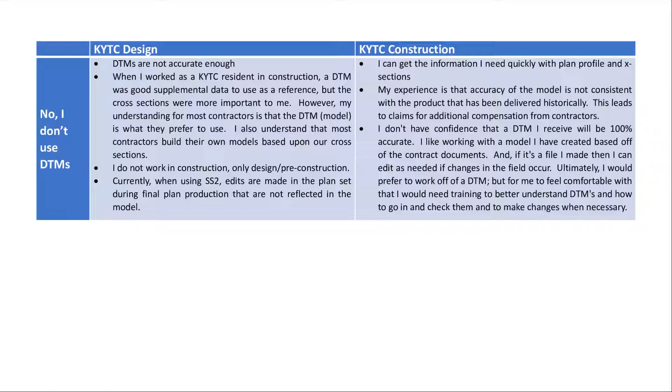So remember, we surveyed design and construction. Here's some comments we got from people that said that they don't use DTMs. When someone says a DTM is not accurate enough, it can mean that they're not seeing the accuracy between the final PDF plan set and the model. Different things are meant that way. We know that InRoads has been capable of modeling to a high degree of accuracy for a while now, so that's not the issue.

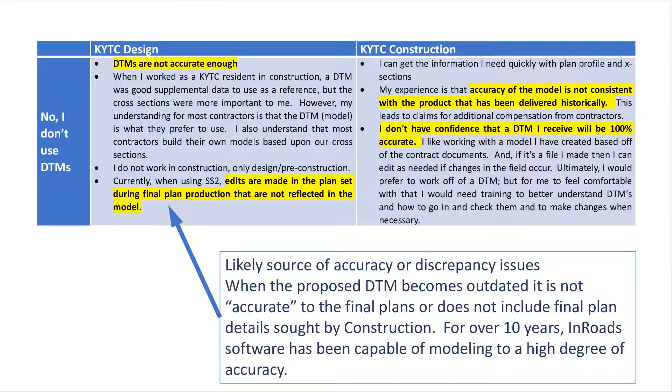Here are some comments from those that do use the DTMs. There's some interesting ones in here.

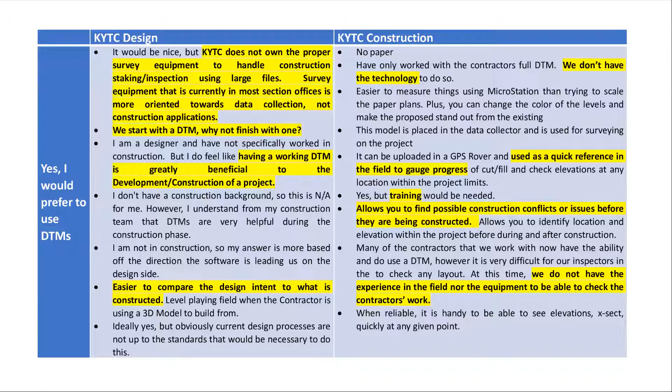I don't know, Brad or Kevin, is this really small for everyone to see? Do I need to go into these more? I can read it pretty well, it's just a small part of my screen. Okay, yeah, you're doing good.

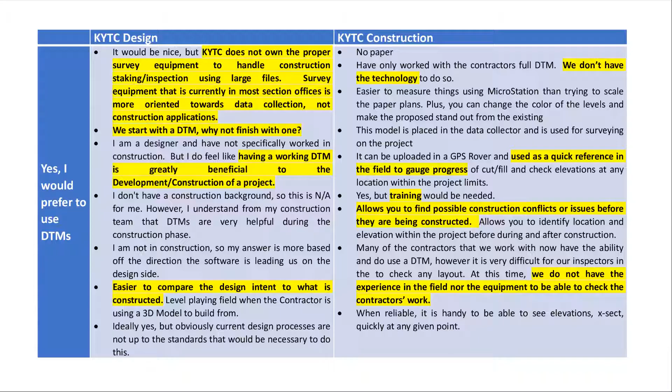It's plenty legible. Some of these were particularly interesting to me. One designer pointed out they thought design intent was much easier to review using a model than paper plans. When training was mentioned, it was said it should be geared towards regular inspection duties. In case we have construction staff on here, there is training available through the CAD support section for that effort to survey on site.

Here's a couple of my favorites. One person in design said, we start with a DTM, why not finish with one? That speaks to the loss of detail that happens when you go to a 2D PDF plan set from a model. Then one person said they didn't have the experience in the field or the equipment to be able to check the contractor's work. So a little bit of work there to be done.

As part of this research, KTC interviewed 29 individuals from construction and design, coming from KYTC and industry - we had contractors, consultants. We provided a list of the comments, and then we tallied those according to how frequent they were made, if there were similarities between the interviewees.

We asked construction what process they followed when they first received the EED for a new project. Do they make their own surface files? We particularly wanted to know what specific elements they looked for, what they could use.

We kept hearing the same thing from these construction interviewees. Everyone was really open and honest - they showed us their processes and the things they had problems with. Overall, they just want to see consistent and accurate break lines. Some people called them polylines - the vernacular varies, but this is the most beneficial product from the design process at this time for these people.

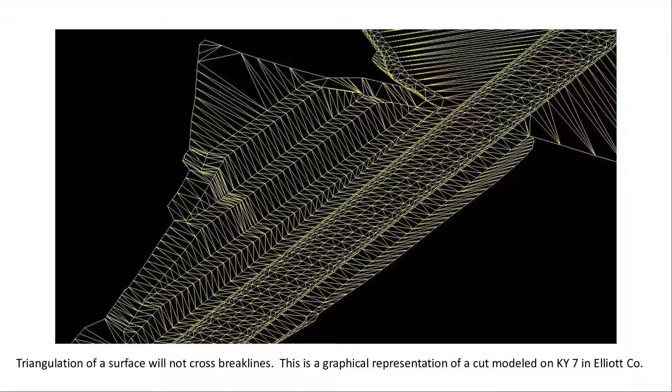When we talked to the designers, we asked them about their workflow in developing the 3D model. We asked if they had plans to implement a workflow for those that currently didn't.

In the interviews, we also heard a lot about the usefulness of KMZ files, a lot of mention of survey training and construction-specific support needs, and training needed for designers who review the EED. On both sides - contractors, consultants and cabinet staff - everyone was ready to start talking about this, and the consultants wanted to understand the expectations of the cabinet and specific requirements for their deliverables.

So the next thing that we did was we looked at some specific projects. Huh? Rachel, back up just a second, I wanted to mention something - you were talking about guidance there.

Something that George and Terry mentioned in that last section is something we've talked about - level of design or modeling guidance that they're working on. Rachel pulled that out of this research, and it was surprising to me a little bit, but really encouraging. People said, just tell us what you want, we'll do it, we just need a well-defined process. That's one of the things we hope to get out of this - to define where we want to go with this, so we're not wandering aimlessly.

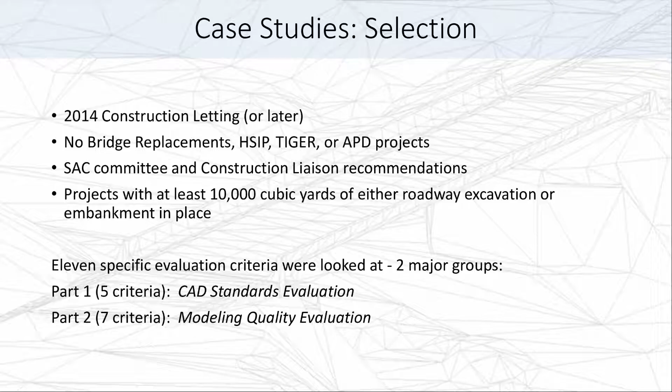I think that's it for that, what I wanted to let you know.

So for the first group, we asked the question: were the CAD standards met for the supplemental file folders?

This is my part. Yep. I can keep talking. You want to? Sorry, you'll be a lot nicer than I am. I don't know, I'll probably interrupt you, so everybody just bear with us. I interrupt Cameron a lot, so. Go for it, I'm used to it.

Like Rachel said, looking at version 3 of the CAD standards, which went all the way back to 2004, I think 2005, when I first came to Frankfort, those were implemented, and not a lot has actually changed. There was a graphic standards group and an electronic deliverables group.

With the implementation, I think it was the XM software at the time, we started looking at these electronic deliverables, and we didn't call it EED, electronic engineering data. I actually stole that from Connecticut DOT recently. Elaine is a good friend of mine, and she had some really good documentation on that, so I took that recently.

But the spirit of that has always been this data that we're getting out of our designs. We put it into the supplemental folder, but supplemental doesn't mean may or may not be needed. It just means it's not the contract document, but here's additional information to use. So we're looking at things like alignments, proposed manuscripts, some of the very important file types for both CEI and AMG if the contractor's using GPS controlled equipment.

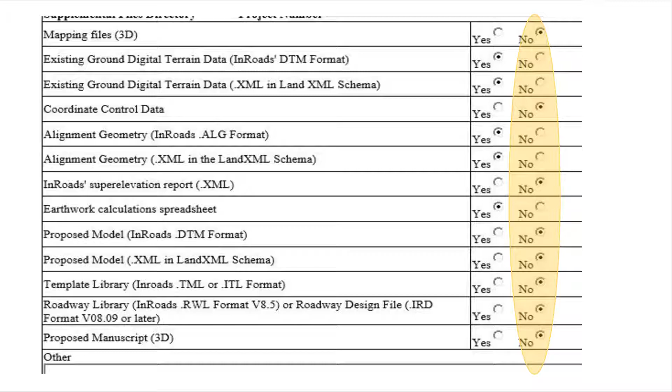Yeah, I'm going to go off on that here in a second. Right, that one blew my mind. So here's an, oh sorry. Did someone say something else? I said deep breaths. Yeah, deep breaths. Let me get on this. Where's my bourbon? Damn it.

And with ORD, just looking ahead, it's going to be a lot more important than it is now. Chris James went over that this morning about the container file systems and all these references that we need to maintain. So it's going to get more critical.

So good logical naming is awesome. If we can get the minimum, and then of course you can go beyond the standards if you want. But also I wanted to mention something that made my blood boil even more.

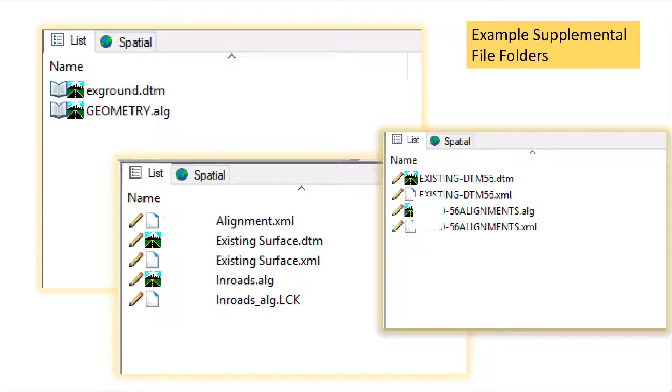So let's talk about some good stuff, right? There's some bad, but there's some really good. So this is a project where, again, they went above and beyond for the pre-bid documents and supplemental information. They went in and put all kinds of subfolders, detailed explanations of what these things are. So kudos to whoever this was. We're trying to keep it anonymous, but this is an excellent example of being well organized and putting some thought into the information we really do want.

Anything else, Rach? No. So let's look at some of Rachel's graphs.

All of them actually had alignment files, so that's good. But then we get a little squirrely. One of the most, if not the most important thing here, is your proposed corridor or proposed DTM, in this case where it was an older project. Only two-thirds even bothered to submit your proposed surface.

So that's really disappointing. And then, Amanda Desmond, where's my girl out here - less than two-thirds of those surveyed provided the coordinate control data. Now again, it's in the plans, we know that, but we really want these CSV files so we can upload this data into the collectors, into your survey controllers. We don't want people typing stuff out of the plans and introducing chances for error - that makes no sense. And this is a simple export out of InRoads, and we're not getting it, apparently.

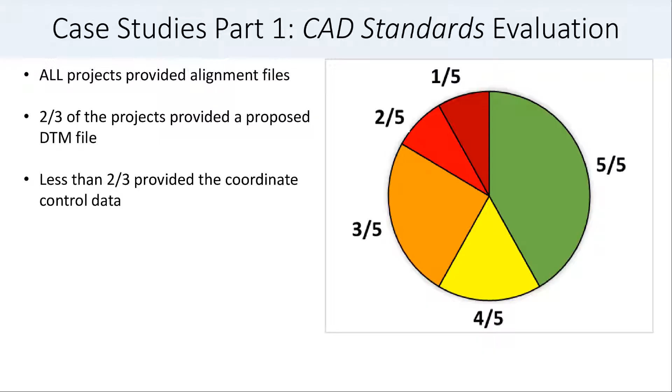Next slide. Yeah, it's required. We want it.

So the next one, now we're looking at more of, this is a little bit more subjective. We're talking about maybe the quality of the modeling approach. Was it consistent template drops? And if you don't take anything away from what I'm telling you today, this is the most important part, people.

Transitions are of the utmost importance. We're talking about super transitions, pavement widening, those things. We really need to make sure that those are captured, especially in the electronic data, because here's a horror story for people, something we have found out recently. I think everybody knows that when contractors don't trust the data we're providing, they digitize our cross sections. Those are the contract documents. So they're digitizing these 50 foot, 100 foot sections. Well, a lot of people revert back to the old archaic drafting crap where you put notes on there for transitions. I'm sorry, but that's not getting uploaded into the damn GPS on the equipment.

They're taking the cross sections. What we found is a lot of these transition points, if you're not dropping critical sections, those are getting missed, and it's screwing up in the field, and people are having to fix this later because they're not catching all of these transition points. So it's either critical sections, or again, if you have a really good model, we can put this stuff into the equipment and catch those without having to worry that there's some loss going on there.

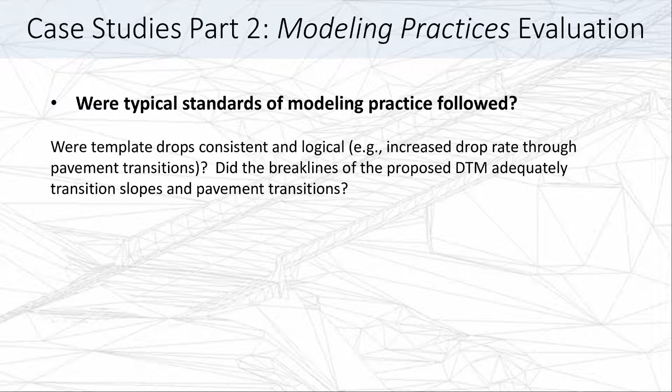And we'll look at some examples here in a minute, but this is really just, I don't know, Kevin's opinion here. Kmart says this is where people are just abandoning the models and not even really caring about what goes forward. It's possible some of them did the modeling, but they didn't turn it in. Yeah, didn't get forwarded for the letting document. And that happens sometimes because when we do make last minute changes, Patrick Stone had a great story in District 6.

He had to change something last minute after the job had been submitted, and he didn't get a chance to update his model. And then the contractor came back and said they couldn't read the cross sections. They don't know how to build from plans. They need the data. So he had to give them updated data. So there's instances like that where we get that kind of a request all the time to try to find the data that wasn't submitted.

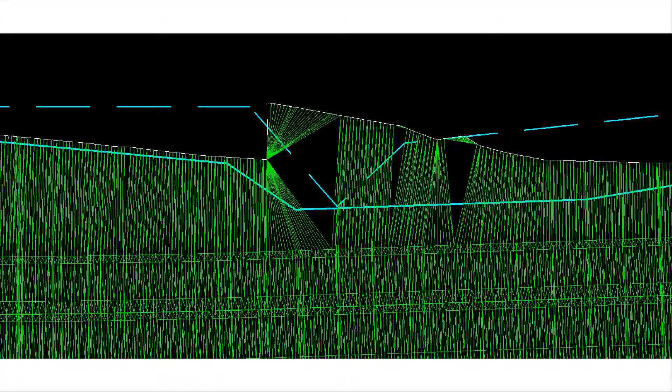Here's another one. And this one's kind of all over the place. You got blast beats going on over there on the left, a little mellow interlude in the middle, and then some kind of hardcore breakdown or groove metal going on there on the end. So it's kind of like a Jinjer song. If you don't know who Jinjer is, Ukrainian metal band, phenomenal musicians, and Tatiana is the best metal singer you'll ever hear. She's a beast, I recommend checking them out. They're all over the place.

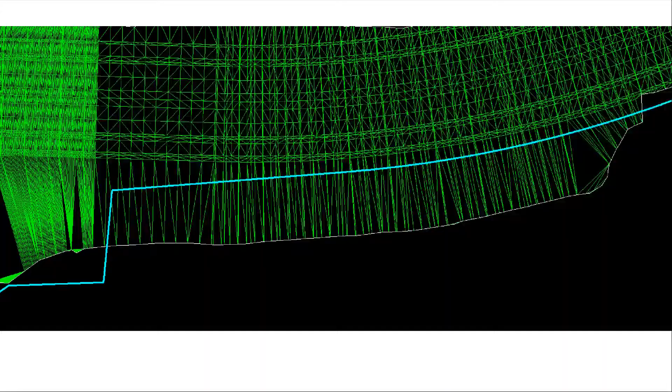But we'll forget about the blast beats on the left, because I'm not really sure why you would have, what was that, Rachel? 0.02 foot template drops between template drops in your tangent. I don't know, but they did a pretty good job here. You see kind of a transition, which may be a spiral into a curve, and you start seeing some densification going through that curve. So that's good, a little bit of irregularity there.

That could be just where the super's transitioning or something like that. So that's great, but again, disturb limits outside of our right of way, that's a little bit scary. Everybody that's ever worked in construction knows that goes on, we've all had to grade to drain. Grade to drain, yeah, wonderful note. Warp it in, that's what Tony McGlone used to say. Swarp it in, what part of Kentucky are you from? I thought you were with me. Swarp it, slide. Yes, Alexa, that is overkill.

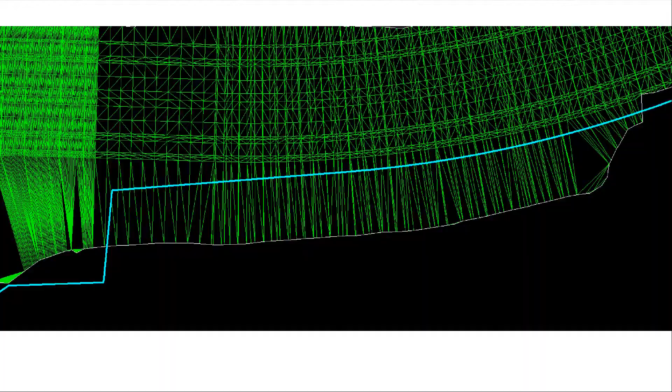And they could tell what these polylines or features were. So this is a great example of the detail that you could put into a model. And again, it's a complex situation that was modeled all the way through as part of the same CAD standards that we've been looking at so far. So you can see the difference here, we're talking about the same criteria, but we're on different ends of the spectrum.

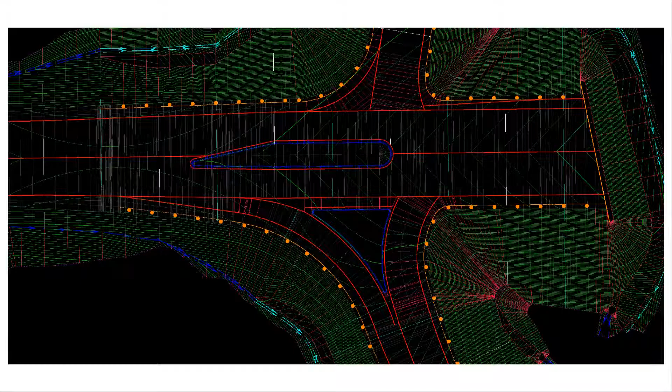Go ahead, do you have something, Rachel? No. Okay.

And then here's another example where you got a pretty sharp radius there, and maybe a little overkill, but again they've modeled this fairly well, and then the drainage box. So this is an area where you want to make sure, like old Gary Poole used to say, roads are for cars, not water, right? So keep the water where it needs to be, and using your proposed model is a great way to look at what the drainage design's doing and make sure we're not ponding water. We're not, I know we have allowable spread, but make sure it's not over tolerances. So this is a good example.

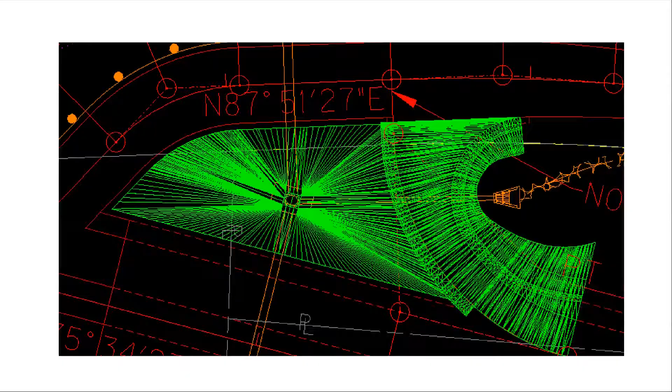And construction wise, laying out drainage, I'm sure for those guys to build it and to inspect it, if you have 3D locates on that stuff, that's going to make it a lot easier on them. Now this is an interesting one too. So all the old farts out here, if you'll notice, the right-of-way line there is yellow.

That changed in the early 2000s. So this is pretty old—the graphics, at least, are old. But check it out, they've got some pretty detailed contouring on the benches, maybe a waste area up there. I think that is a waste area. So looks like there probably was some modeling done on this project. But the interesting thing is this is actually a 2D file, which kind of defeats the purpose of having really good 3D design when we just get a two-dimensional file. That doesn't really do us any good.

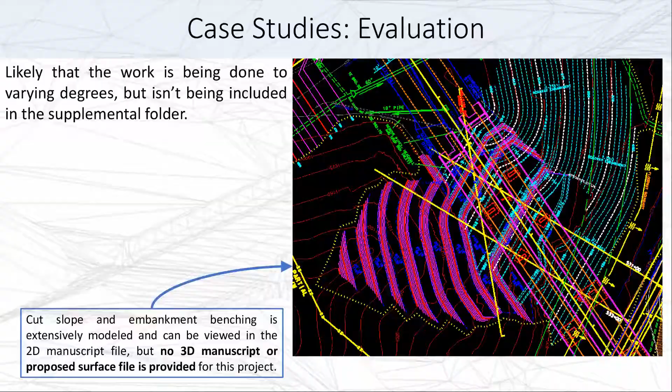All right, going back to this really good example we gave you earlier that had a lot of good file folders and organization. The project had its first TC10 in 1991, and professional services gave me the information that this project kicked off to consultant design in '98. I was still in college. Compare that with the idea that professional services had no record of a contract mod dealing with updating a project for modernization of the CAD standards until this year. So basically you have people doing, just like Kevin said, a wide spectrum of modeling.

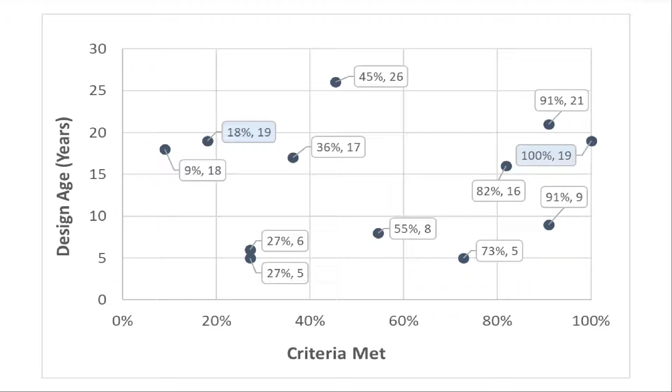So I don't know if Kevin wants to share, but he had a little conversation with one project manager recently about the EED supplemental folder requirements. Again, we just think there's probably a lot of misunderstanding about what's required.

Yeah, just to make sure everybody knows, if you read the CAD standards policy, all projects are required to submit this—what we're calling now EED, but again it was the supplemental information, the DTM, all that stuff. It is a contract deliverable. It is required, and unless there's a really good reason why it's not needed, that'd be a different story. But this is information that we need. Our inspectors desperately need this stuff. Our contractors are asking for good models. So since about 2004-5-ish, this is a requirement.

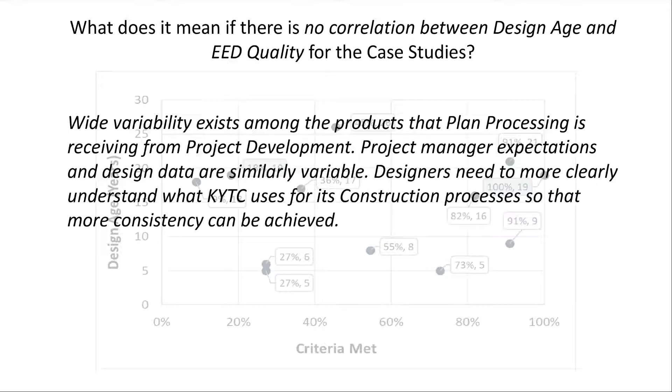So the research project made a lot of recommendations, and the cabinet's already looking at those. We grouped those into categories. First was to strengthen the quality of the EED, and we've been talking about that throughout this presentation. The standards are already there, just need to strengthen the quality of what's being received as a product of the design process. And then another elephant in the room is that professional services contracts will have to be addressed with regard to the modeling and with ORD, obviously.

Yep, shifting hours around, right? Just shifting. Right. And then becoming really clear about what is expected at the outset of a contract with the consultant, and of course, always staff training and staff support after things get underway. And then one of the recommendations was related to beginning that information exchange with industry—not just the consultants, but the contractors. Everyone is ready to talk about this. So we need to talk. Everybody can learn from one another, and we move forward.

I didn't go into a lot of recommendations in this presentation because we want to talk about what the cabinet's getting ready to do. Yeah, so exciting news, at least for me, because I've been trying to do this for 20 years. Well, first off, I want to back up—something I didn't put on this slide. Great news: KTC has been given a 3-year contract to help us implement digital project delivery.